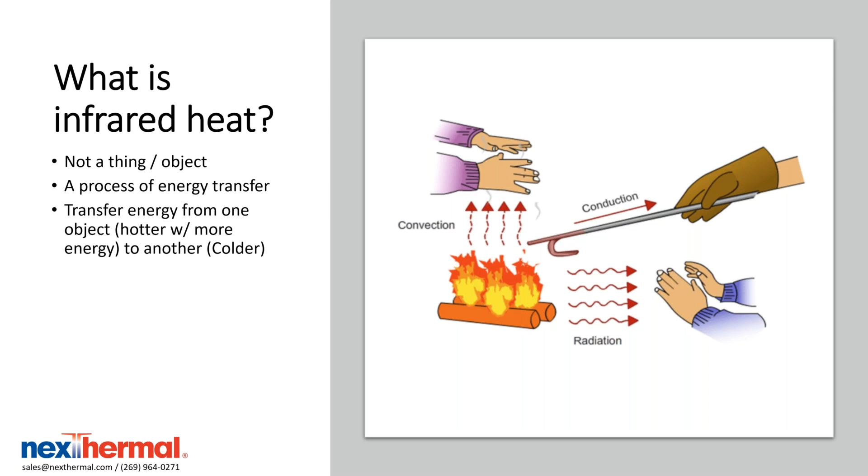And what that means really to everyone here is you talk about absorption, and Elstein can be used to heat plastics, even heat glass, many different materials, many different applications. And the main advantage really of radiant heaters over some of the other types of convection heating is that you have the ability to heat materials much faster.

Radiant heaters are more efficient because their electromagnetic waves are intercepted and absorbed by the material being heated. So with convection heating systems, you're really heating the air in a given space, and then the air heats the material. That takes longer than what you get with an infrared heater.

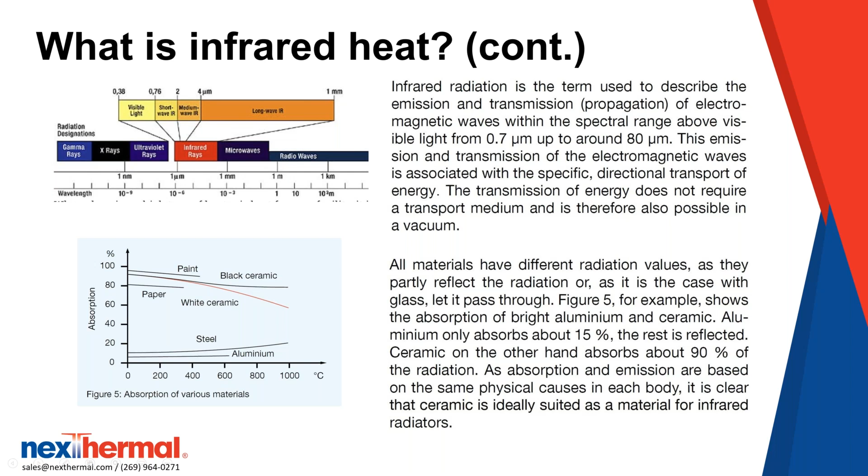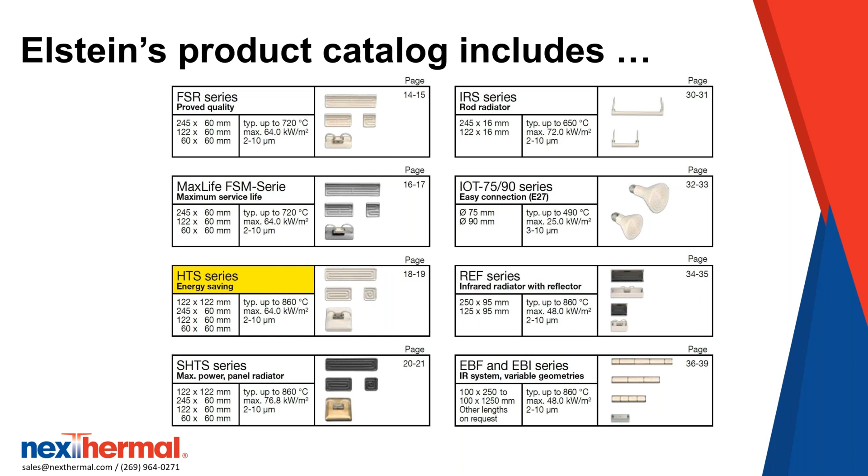All right, so Elstein has a wide variety of products. Their catalog has over 50 pages of products, and we're not going to go through all of those today. We're going to talk about the first three here, the FSR, the HTS Max Life heater, and the HTS energy saving heater. But I just wanted you to be aware there's a wide variety of product offerings from Elstein,

from simple heaters like you see here in the bottom right. They almost look like light bulbs, but they're not, but they can actually plug into a light bulb socket and operate as heaters. Or there can be full panels that have an array of heaters on them. 100 heaters are not abnormal, so they could build a whole panel of heaters for you.

All right, so the Elstein FSR heater, this is the most commonly seen and commonly sold heater in the industry. It's a concave shape. They come in a couple different sizes, as you see there. The largest one is about 2.5 inches by about 10 inches long. And they go in smaller and larger sizes from that and different styles of heaters.

This particular heater is available from 60 to 1,000 watts and has an operating temperature up to about 750 C. The heater is also available with an internal thermocouple, and all of the Elstein heaters come with a mounting clip system there so that this can mount right into a piece of sheet metal on a panel for ease of installation.

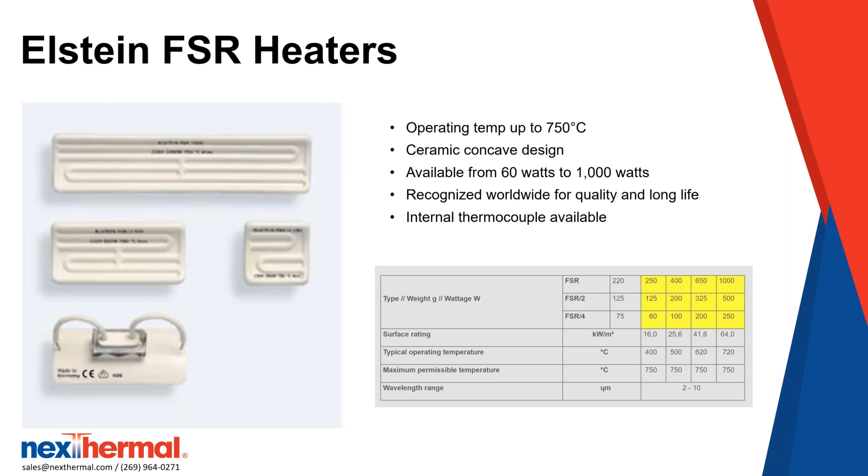Next up is the Elstein HTS heater. This is a high temperature series infrared heater, and it operates at up to 900 degrees C. This heater is unique in that it has a hollow casting and insulation in the back of the heater. And what that gives you is a significant reduction in heat getting into the wiring space behind the heater. So in essence, more of the energy, more of the heat is being pushed out through the front of the heater, and there's less heat loss.

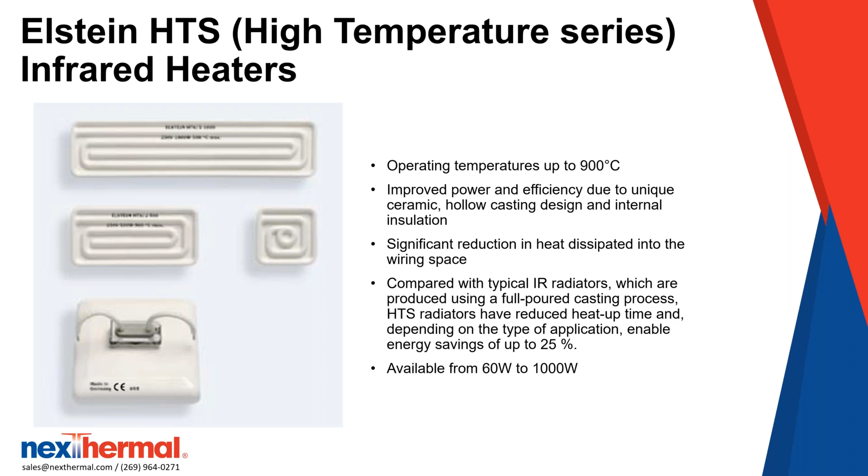In addition to the hollow casting and internal insulation, what that really means is you could get up to 25% energy savings using this heater versus like an FSR style heater. All right, so we'll talk a little bit more about the energy savings a little bit later, but let's take a couple minutes just to talk about where Elstein heaters could be used.

Some of you may already know you have these in your plant. If you're a distributor, you may be wondering where Elstein heaters could be used, so this will be helpful for you as well. We see a lot of applications in thermoforming, especially here in Michigan with the automotive industry. You'd be amazed at the number of thermoforming plants that are here in the Midwest, but they're all over the US too. There's also vacuum forming applications.

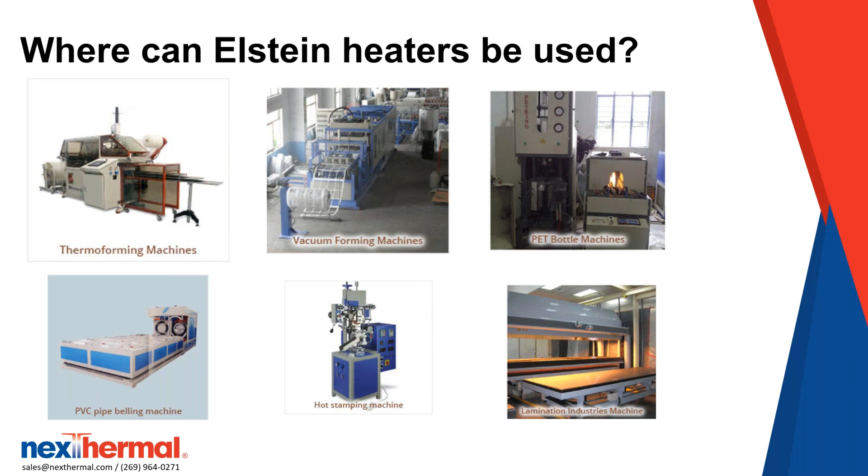Many of the plastic bottles have infrared heat as a heat source for that forming. PVC pipe belling machines, hot stamping, laminating machines. This is showing a couple images of a pipe forming application. So there's heaters that are going 360 degrees in circumference around a large PVC pipe to heat it up for bending.

A lot of infrared heaters in the food industry, and that's becoming more and more common. You'll see them in warming systems, chocolate coating systems, even processed cheese, and baking and browning machines as well for cakes and pastries, things like that.

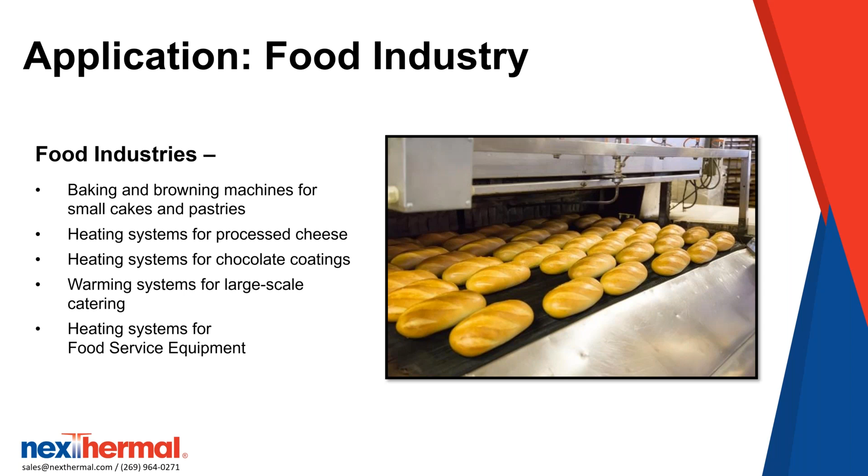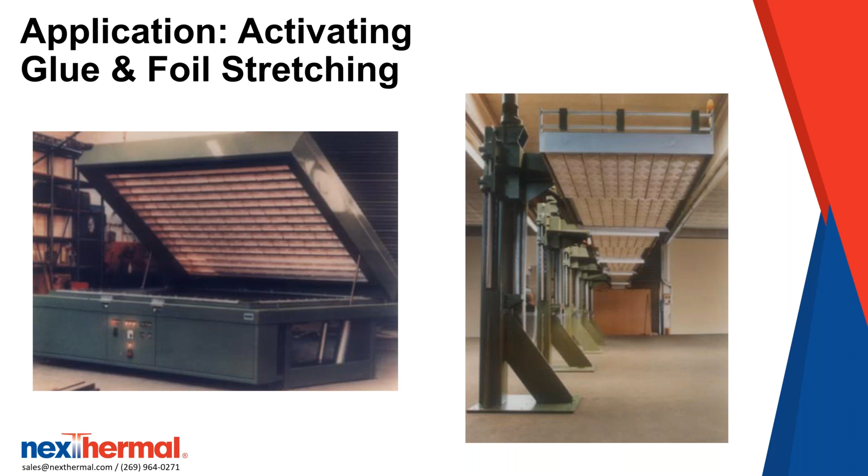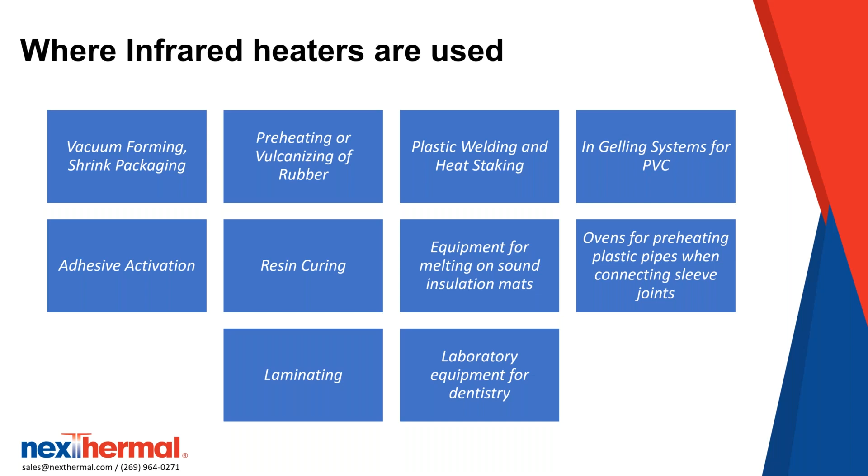And if that's not enough for you, yes, there's even more. We won't go over all of them, but you'll have access to these slides after the presentations. And if you see something in the world that's not listed here and you're curious, we're here and can tell you pretty quickly whether it would work or not.

But as a general rule of thumb, pretty much anywhere where non-contact heat is required or is preferred, we can come up with an Elstein heater or a system of heaters that will work for you to heat your product.

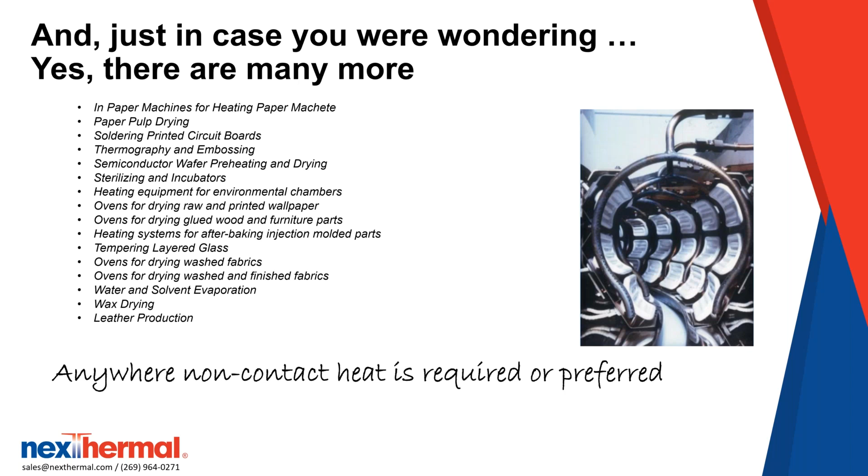So there's other infrared heater manufacturers out there, and why would you choose Elstein? As we've already mentioned, Elstein is the originator of the ceramic infrared heater, and they came up with the first patent. What's unique about Elstein is their focus on quality, and you'll see that in the construction of the heater. A very precise location for the resistance wire and the uniformity of the windings of that wire give you a more durable design, and they also give you a higher performance heater.

We're very proud of the quality that Elstein provides in their heaters, and of the thousands, maybe tens of thousands of heaters that we've sold, we have a very, very low RMA rate on those heaters, and the life, you'll see in a little bit, the life expectancy on our heater is better than anybody else in the industry.

In addition to the quality and durability of the Elstein heater, when you buy an Elstein heater here in the US from us, you get the Nexthermal engineering and application support, which is second to none. Because we've sold these heaters for many years and we've seen many, many applications, our engineers here can help you as far as designing a system or coming up with a solution where you're not happy with the thermal support that you're getting right now.

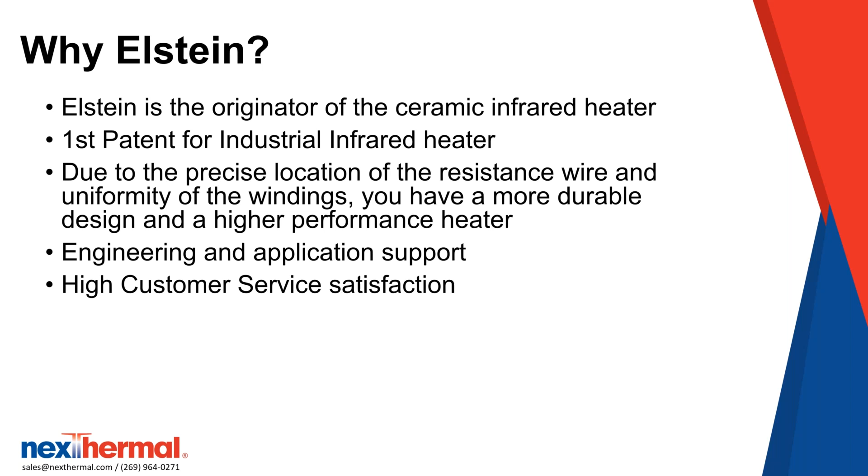And our customer service department here at Nexthermal takes care of all of the Elstein inquiries, whether it be an RFQ or request for more information, engineering support, whatever. It's all about customer support, and Nexthermal does a very, very good job of supporting the Elstein product from beginning of sale all the way through field startup and after sales support.

So continuing on, Elstein's the only company that has a written warranty on service hours, specifically for the HTS Max Life heater. What we've heard from customers that have bought Elstein is that they typically last 50% to 300% longer than the heater they were using before. We have a very tight wattage tolerance, right around plus minus 3%. Elstein uses a unique ceramic material and a proprietary glaze, which gives the heater the durability and a higher emissivity than our competitors.

Elstein does 100% physical and electrical inspection during their QC process. So before the heaters are shipped to the end customer, they are 100% quality checked. And as I mentioned a few moments ago, they have a unique stainless steel mounting clip that provides extra durability and ease of installation on the heater. And later when you go to replace the heater, the clips are easily removed and the heater is easily replaced.

All right, so tying in with why Elstein, I just wanted to take a couple minutes and talk about the HTS Max Life heater. This heater has a unique design and has a unique warranty that Elstein offers that nobody else does. And what it really gives you is 3 times the service life of a standard FSR heater. What does that mean? So if you're replacing heaters once a year, now you would only have to replace them once every 3 years. So fewer shutdowns, fewer maintenance costs, and longer life.

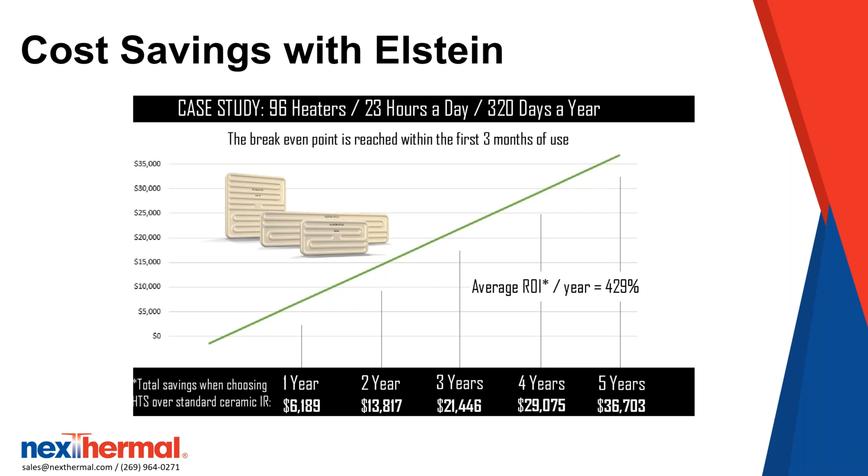And so then they called us in and said, well, we want to buy a couple hundred heaters, and can you put them in a panel for us? And oh, by the way, could you also control those heaters and provide non-contact temperature sensors to control the heat? So in the end, we provided heaters, a panel system, a control system, PLC controls with a graphical user interface that had the ability to do different products and different batches. And we even subcontracted with an electrical contractor to do the electrical install to help provide the electricity in the plant to run all these heaters.

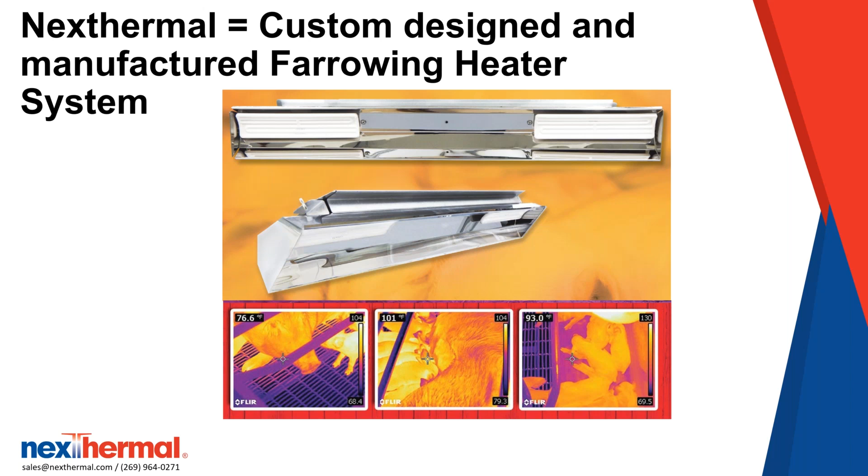So kind of just going over Nexthermal and Elstein together, what we do is provide systems that would do controls either for one heater or just a couple heaters off of one controller. We can do all sorts of thermal analysis. We can do development and design work with you. And in addition to that, because of our offices in China and our plant in India, we have international sourcing capabilities. So we can offer things that nobody else here in the US can offer.